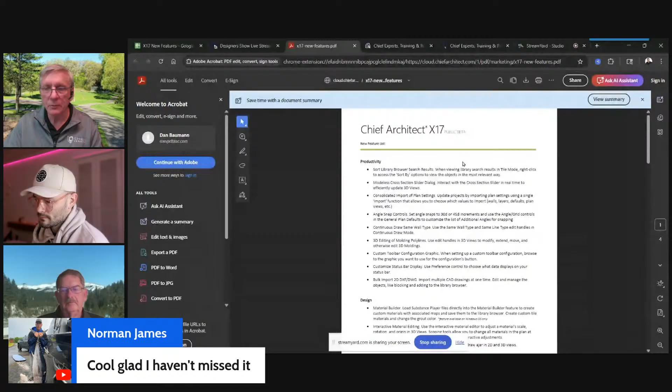This is something they do on every release, and it's a nice summary of some of the new things. Rene and I were just commenting that it's not a really long list. Actually, it's not bad. It's 4 pages. But we've both been discovering a lot of other little things in Chief that aren't necessarily even on that list. So it's a nice update, really a nice update, I think. And a lot of new things have been added.

The other thing you'll see on this is view the Chief X17 What's New page. And this is not available yet. I couldn't find this link anywhere on their website. All I know is that each time they do a new release, they use the same exact link. So I just clicked the link from the last X16 update, and it took me to the X17 update. Don't tell them that. They're gonna fix it next year. No, they'll change it. Sorry.

Anyway, so here's your X17 new feature summary, and actually with the PDF, they use the same link every time too. If you just change that number, you'll get the new updated one. Anyway, so Dan, it's a nice way they keep it simple.

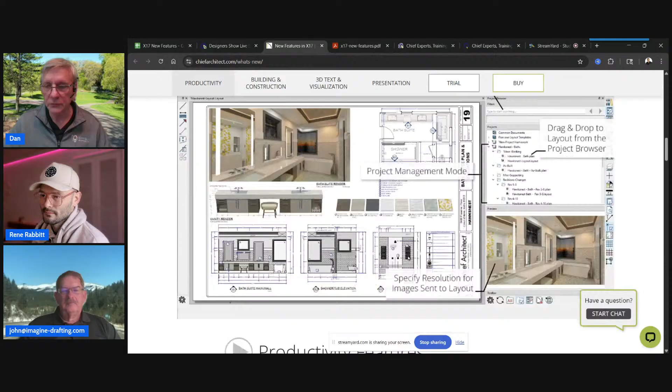Okay. So the thing that's nice about this, and I highly recommend you watch all of this stuff because they really do a nice job. I'm going to give Chief a super kudos here because they really do a nice job with these graphics, showing some of the new features. They got a quick list here, basically the same list you have in the PDF, just sorted out with some nice pictures. So check it out.

And there's about a 19-minute video, or they've broken it down into smaller videos that, again, kind of zip through some of these things pretty quick. And it's really a nice synopsis on some of the things that they've added to the new release. So check it out after the show. You guys been on that page? You've seen that? Oh, yeah. Any of you? Okay, so you've already been there. Is there a link to that on their website?

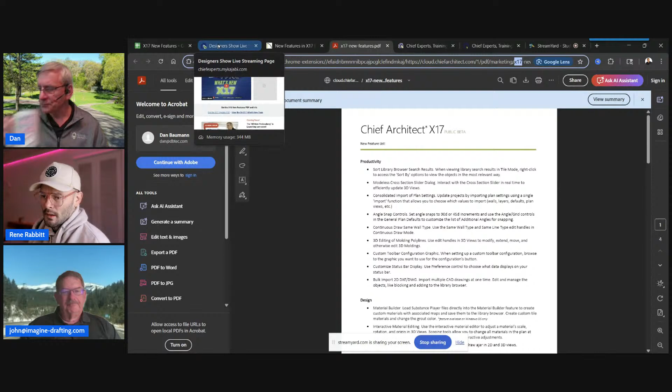They don't usually put that up until they're out of the public beta. Oh, wait, show me again. This page right here. Yeah. What's Chief Architect X17? Because if you go to their website now, it's just X16. They don't put this page up until it's out of public beta. Yeah. So it says beta now. There's got to be a link somewhere because they're saying it's in beta now. So I just couldn't find it. So I just use the same link every time.

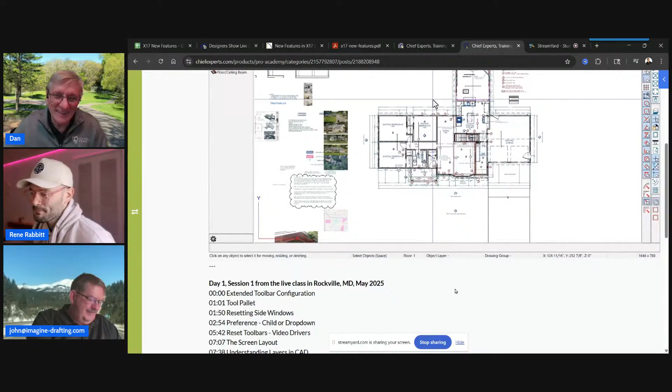Remember, I've been doing this for almost 30 years, and I started out doing my videos like this, where I had to go through each one. I had no choice. There was no AI. And I listened to probably thousands of hours of myself. And after a while, I don't want to listen to me anymore, but I'm okay with it now. So I guess I'm on my next stage of my career of Chief Architect training. So it's kind of cool. Anyway, it's a little time consuming, but it's all right.

I'm enjoying it. So let's talk about the new updates. So I just kind of took that same sheet that you guys can get from that link, that new features list PDF, and I condensed it onto a spreadsheet. So we're going to just go through some things today. We're going to talk about the yellow things today, and Rene and I will take turns. So Rene, what I'm going to do is just kind of pop through this list on my tab and go through those, and then we'll switch to you, and you go through your things. But you guys feel free to chime in too.

So let me start by saying we're not going to touch Project Browser a ton. I already see a comment coming up from Mike, who we know about Project Browser. Yep. We could kill multiple shows on Project Browser.

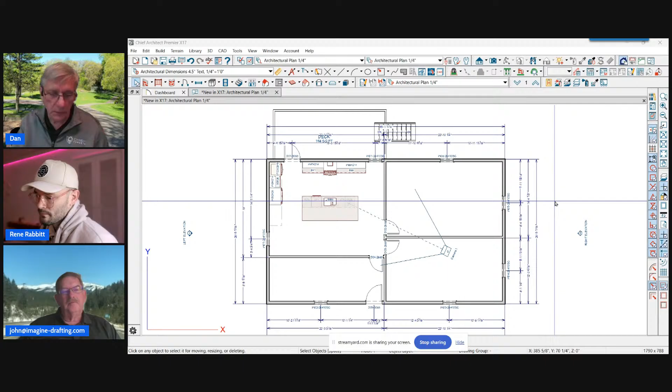As long as you brought that up, real quickly. Yes, there's a lot of controversy about it, a lot of comments, a lot of good and bad. We are totally aware of that.

So Rene and I were talking yesterday about that a little bit, and kind of like, all right, that's cool. One of the things about it is it depends on what you want to do with it. So for someone like me that draws by myself, I don't have other people, but I do share plans back and forth with my clients. I'm going to try it and see how I like it. I've only been in it for a little bit. I haven't really dug into it at all. Rene, you've dug deeply into it, so you know a lot more about what's going on with it. So that's why you did that video. You wanted to share that with everybody.

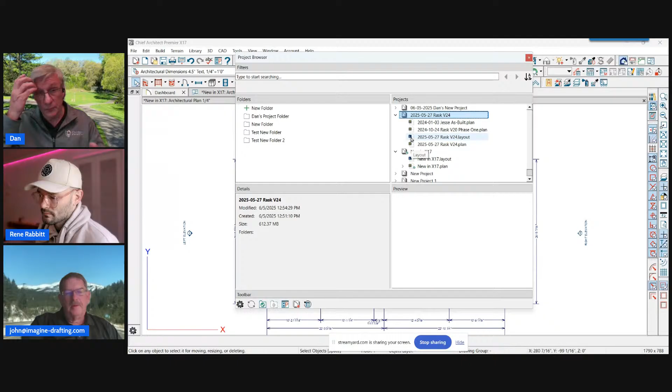The main thing to understand about the new project browser is Chief keeps everything in one big database. You can't just go find the plan or layout file in a folder somewhere because it's in a database file. All right. You can export the plan as a plan or as a project. You can export it as a, what do we call it? A backup like we did before, and open it like you've always done before. You can open any plan from anywhere on your computer at any time and put it in your project or not. So you don't have to use the project browser.

So I think there's a lot of benefits to it. On the other hand, it's going to take some getting used to. I don't know. What are your comments, Rene? Real quickly, so we don't spend a lot of time on this today. I think it takes some getting used to. I think there's some really nice things in there for versioning and ease of use and quickly navigating your own single user files.

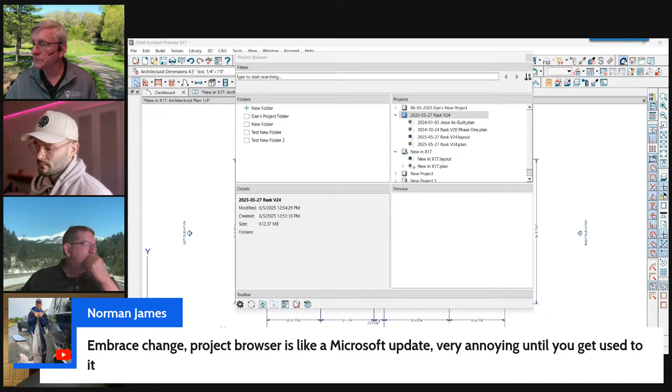I counter a little bit. I look at the traditional methods and the way people had their workflows established, and there's a lot of value in what they were doing, how they had it working, and how they see their teams and collaborators working. And it does not work that way. So it relies on human nature and habit in order to overcome that or work around its deficiencies. But Chief has said that they recognize that there's issues being brought up in the beta, and they're going to be building in corrections to those as it moves forward. They just haven't said when.

And originally they wanted to have this cloud-based so that you could access the cloud from any of your devices and everything's there. Well, they took that part out to get this part going. So this is a precursor to maybe the next version where they do introduce the cloud-based, where you'll have access to your things and you can share links to others to get to the same things, and it'll lock the file when you're working on it. So we got a lot of good things coming. They've been talking about this for a long time. I'm glad to see they've got this going, so that's pretty cool.

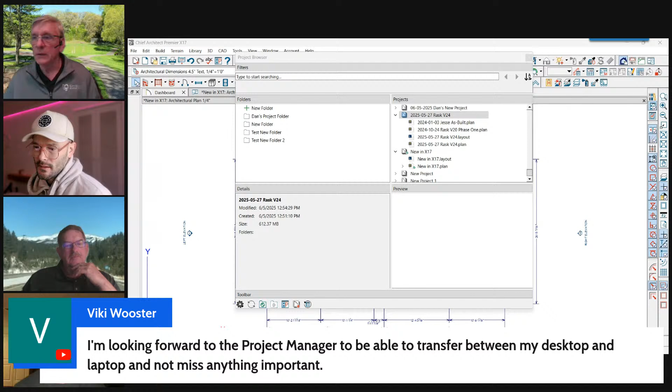Viki said she's looking forward to the project manager when you'll be able to transfer between desktop and laptop and not miss anything. And yeah, Rene, what's your solution to that right now? Well, just export your CA project file. And my suggestion, and this is for your own risk tolerance, is delete it from your machine once you do that, because that export is the active copy. Think of it as you're just saving it. That's it, right? Yeah. And when you save it, close your machine. It's not in Chief Architect anymore. You got to go find it and open it again.

Yeah. So if you're going to be collaborating with someone else, or you're going to go from one machine to another, export it, delete it from this machine. And so when you export that, is it taking everything? Yeah. In fact, Dan, if you hit delete right now, instead of export, it'll do both.

It'll export and delete, that's why they have it there. Yeah, so that makes sense. So you could do that. Don't worry about losing anything, because you do have a copy in your archives folder. So that's still there like it always was.

So you could even just go open archives back and forth if you wanted to, if your archive was on a shared Dropbox or something.

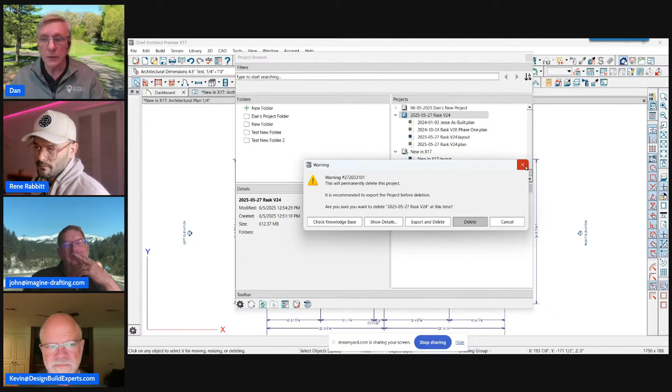What they have said, Rene, I was talking to you about this yesterday, was under the project management, I was wondering about this. Because when you uncheck this, it says do not put this on a shared drive. So when you go browse, it says don't do this, your life will end and everything will be miserable. I can tell you some advanced ways to do this, but that's advanced. Not today.

So the one thing I want to say for people watching this show is this is all working towards a system where your account is essentially able to share files across accounts through a cloud to someone else seamlessly. Keep in mind, Chief is having to work around a billion copyrights to come up with their own system, so I think they're doing a really good job. They're working towards it. I agree with you, Rene. They're doing a superb job and it's getting there.

So I think one of the big challenges they're trying to overcome is sharing. Of course we already know that, and I do that with Dropbox now, but it's the linking of all the stuff that goes within what you're doing, between the layout and your PDFs, pictures, graphics, and images and all of this stuff. It just doesn't get saved in one file, it's all over the place.

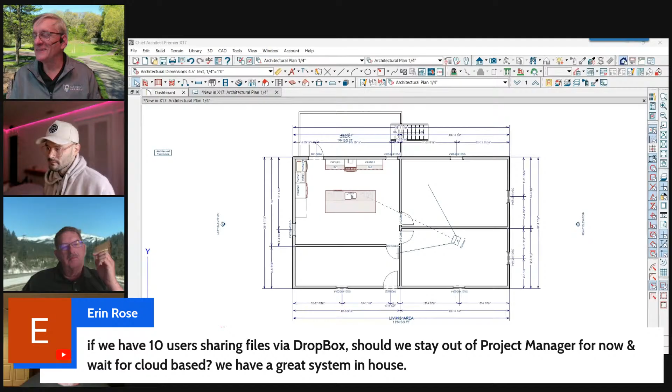My recommendation, Erin, with 10 users sharing files on Dropbox, is that's a dicey risk that you may want to stay with the traditional until things are either more solid or more advanced in terms of sharing and collaborating. I would agree with that. That's what I'm going to say. If it ain't broke, you finish the sentence. If what you've got is working, don't mess with the project browser right now.

Especially for collaborators, especially for teams. Do it, it works great individually, but for teams it's tougher. But hang tight on those comments, because as we dig into it deeper, I had to argue this one to the hilt, man.

And as we watch Rene's, let's come back to this topic. So for now it's working fine, don't worry about it, we're going to figure this out. And Rene, I know you're already on top of it, so go watch Rene's video. Maybe you'll come up with a better decision then, because he just finished this video right before the show, so I haven't even seen it.

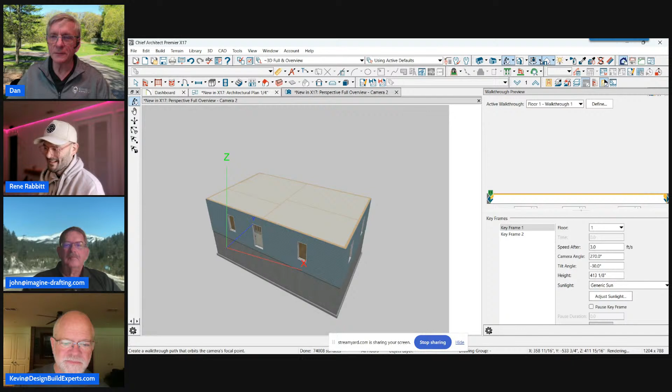So when we go into a 3D view and we go to our cross-section slider right here, this little bad boy right there, that is... where we go here? Wrong one, those two icons always look the same to me. Okay here we go, I didn't want that one. Let's try this again, okay here we go. I keep clicking the wrong one, I didn't want that one either. Let's start over. Okay, 3D view, cross-section slider.

And what we could do now, what we couldn't do before, is this.

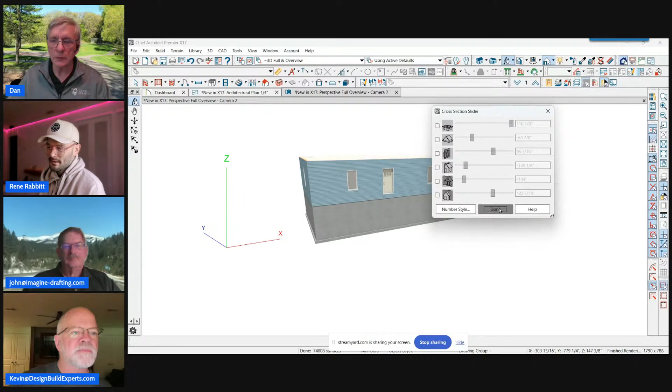When the cross-section slider was open, we couldn't interact with our model. So now we can do all of these things and still interact with the model, look into the rooms, rotate it around. I really like this. It'll be really handy when you're trying to figure out how things are lining up. You'll stay that way until you come back and turn it off. I think over time we're getting to a way to do 3D details really easily.

I think we're a little ways off, but we're getting there. I agree, because the models are starting to get so good, especially when you add framing and all that stuff. There's still things, overhangs and all that, that have to be fixed, but it's getting close. They're doing a really good job.

Consolidate import of plan settings. They used to have separate things in here - import plan views, import layer sets, all different things. Now it's just called import settings from a plan or a layout.

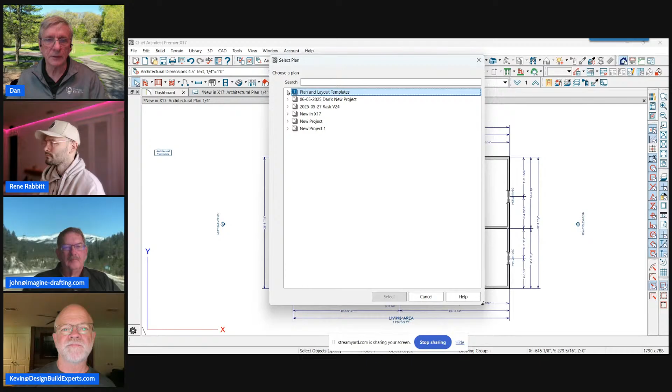Let's take a look at that. File, import plan. If I go find a project or a plan that I've worked on, or even a template - this is one of the things I like about the project browser. There's all the different templates you could have if you're using multiple templates. I like one template, but let's say I go to this plan here and I want to import some of the things I've set up in this to put it in my template. So I've opened my template.

I'm going to import some things from a plan. I go select - okay, I guess I could go yes there. It crashed before when I was screwing around with this. Okay, so here's all the different things I can import now. I could import a plan view, import default settings, or import just individual ones. There's obviously a lot of stuff going on, but this is really slick.

If you've been in a plan and you've set up a layer set that you want to have part of your template, now you can do that really easily. Just go open that and import it to your template. Done. So I like this a lot. It's all in one place, very well done. Any comments on that, you guys?

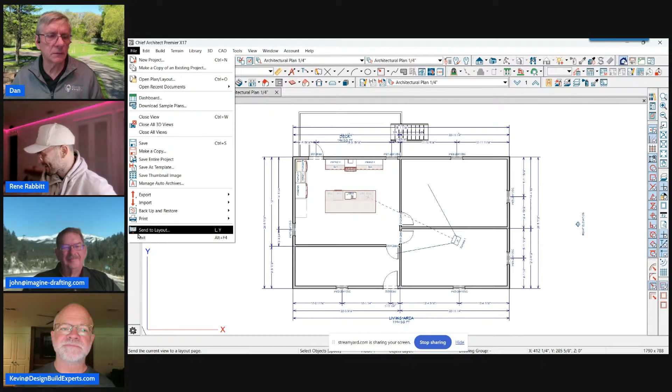We still can't import floor default. Oh, okay, dang it. Does it do all the defaults? No, it doesn't do the floor default. Doesn't do any of the floor defaults, but it does defaults though, right? Yeah, it does everything else. It still imports all the same defaults it did before, and we've never been able to import floor default settings.

Okay, Rene, I'm assuming you've brought that up. Why wouldn't they? Did they just kind of miss that? I don't know, we've brought it up for years. Floor ceiling platform - it's the only thing keeping you from truly transferring from an old template to a new template easily. Okay, anyways.

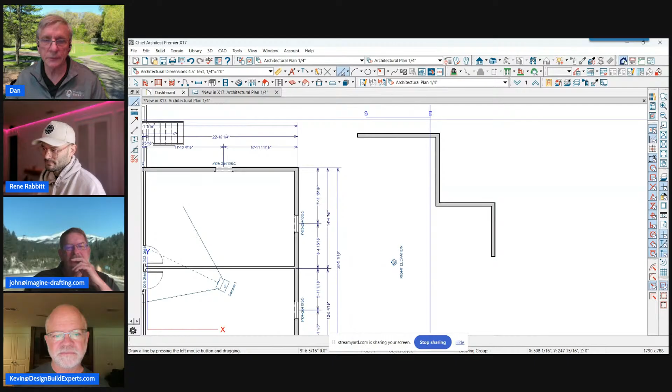This next one, continuous draw, same wall type. For those of you used to drawing with your right mouse button - this is one of my favorite features. If you draw something with your right mouse button, lines or walls, it just keeps it hooked up while you draw, click, and hit your space bar to end. Now you can continue doing that just by grabbing the copy end handle.

That is cool, it's so cool. Break that wall, Dan - just break one of them somewhere. This is common for me. And then now right click that continuation handle. That is just sweet. It is really nice, that's a really super nice feature.

By the way, you could hit left and right mouse button together to stop your draw as well. Either one will do it. Does it work for anything? Is it doing space when you do that, Rene? Same for polyline - no, it's not doing a space, it's just stopping the action.

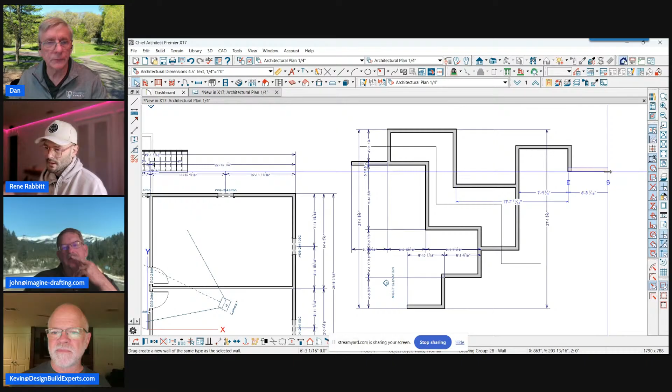Space bar stops it, or if you click space bar it's select objects, but if you just left and right, you're still on the wall tool. It's kind of interesting, because if I start drawing a wall here and then I hit my two buttons, oh, it just still drew the wall. Okay, before it deleted it. All right, cool. That's good to know.

In fact, it'll cancel some other stuff too, but I can't remember everything it does. All right, let me get rid of those things.

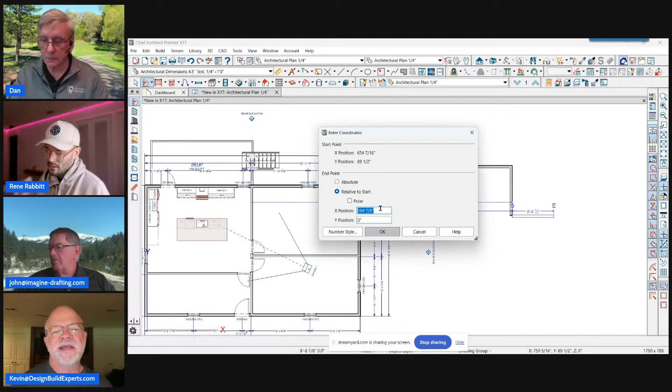Oh, and you can also, Lance just brought this up. This is a good tip: you can use tab in the middle of continuous draw, and that will continue. So draw out a wall, hit tab, right click, draw out. Type in your distance. So if I go minus 10 feet, hit okay. And it's still in continuous mode, so now you can draw with precision. That's cool. This is one of the coolest productivity things that's in this list.

They need a next button here too, but I like that. That'd be great for doing surveys.

All right, there you go. That's the alternative, not type, alternative, what do they call it? Alternative something, function. Right mouse button does a ton of stuff.

All right, then I've got custom toolbar configuration graphics. Look at that, I created my own little toolbar and I put my own little icon on it. How cool is that? So I can switch back to these different toolbars now, and then I can, so you can create your own little custom icons to switch between toolbars. That's just a matter of you go customize toolbars, and you go to the configuration tab, and now when you have created a toolbar, you have a place to choose an icon.

So kind of cool, Rene, I bet you have a bunch of those, don't you? Yeah, yeah. How many toolbars do you have now? I think I kept it to 6, but okay. I mean, you could do that before, it just wasn't as easy. And yeah, so that's nice.

They're actually working on toolbars right now too, so I'm excited to see what happens in public. What do you think they're doing? Any idea? Mainly I've been badgering the heck out of them so badly about sharing configurations that I think they've got a couple little features they might get into. Oh, you mentioned you might get that in X17 yet. Maybe. We'll see, that'd be cool.

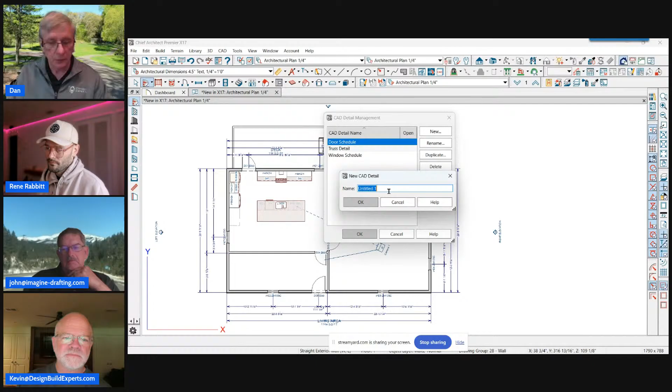I never imported a DWG into a plan I'm working on because I don't want all the crazy layers, but I'll just import it into a CAD detail window. So if I go to my folders, you could have a whole list of details you want to bring into Chief and organize, maybe they're part of a library. You want to bring in, start setting up your libraries from all the details you have, but you just drag those onto the screen and you're going to get a little menu here that says show import assistant.

This is really nice, I haven't tried this. Yeah, this is really nice. So if I want that thing that pops up to show, create polylines, put them on Chief's menu, which I probably maybe would, but it also automatically puts the detail into a CAD block. So you don't end up with a whole ton of lines on top of each other from all the different details. It creates little CAD blocks and sorts them out on your screen for you.

So you could even get them to add them to your library automatically. You wouldn't even have to, if you had all your CAD blocks named properly. So let me just go ahead and hit this. I have just two here. So I can go check these options, that there's all the different layers that are there. I'm going to import them with the layers that they already are on, in inches, and hit finish. And then it's going to import those two DWGs as separate CAD blocks that I could then add to my library, add to my plan.

You never even have to ungroup a CAD block in Chief, just so you know. You don't have to ungroup that to edit it. You just use this little icon right here to edit within the CAD block. So that allows you to edit just like it's ungrouped, but you're still working within the CAD block. So you don't have to end up with all these extra CAD blocks in your plan.

And then when you're done, if you were to import those two, it's going to create those CAD blocks for them, but if you would check the add to library button, it would add them to the library as separate CAD blocks in the library. Yep, it'd be separate items in my user library. One day, I hope they say, add to library in this folder. Oh, there you go.

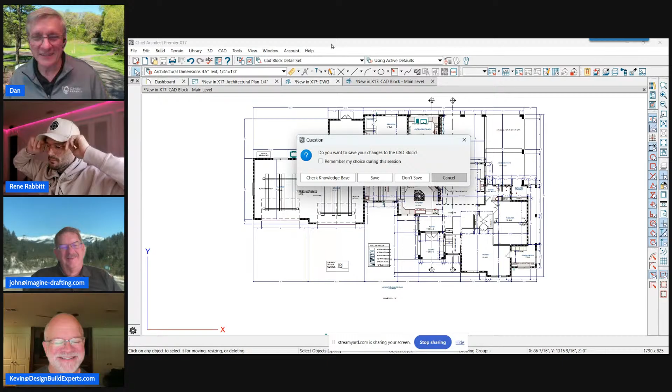And my little trick with this too is if it's a lot of detailed CAD stuff and I'm just referencing it, I'm not actually utilizing the CAD, I'm just drawing over the top of it or something, I'll put this in a separate file and reference it so that I'm not getting slowed down by big CAD blocks. A separate plan file, you're saying? Yeah, a separate plan file.

Hey, Mike mentioned this. I want to tell you, hey, Mike, contact me. I can make you those. He's asking about dark mode icons for Chief. There you go. I did Apple theme icons for someone once. You have too much time on your hands, Rene, and I don't know how you have any time. It's automated. That part's easy. I'd do it for him.

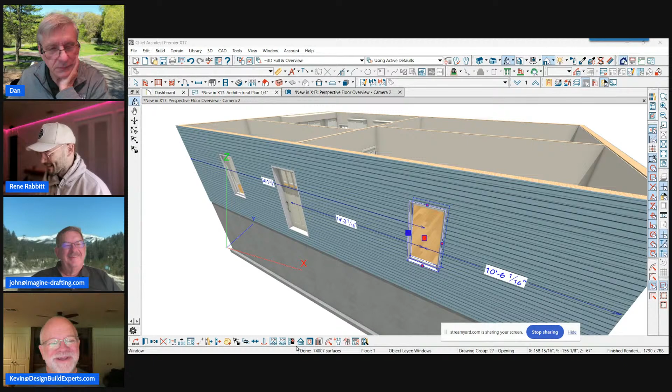So I have a question about the DWGs. Do they have it so you can batch export plan views as a DWG? I don't know. I didn't see that on the list anywhere. So export project, that's not DWG. Export all floors. This doesn't look any different than it's been. So I don't think so. You maybe want to export your elevations and all of that kind of stuff.

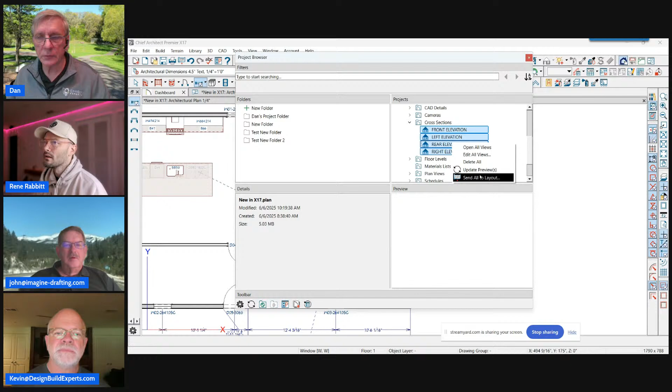What would happen if you grabbed them in your user library and then right-clicked on them? Do you get an export option there where you could multi-select? Let's see, you get export all floors, and you get export current view. Yeah, that's all I see. Edit, update, preview, send to layout. Nope. I don't see any export all. Delete all, edit. Yeah, one of these days. Okay, don't see it.

I just showed you a feature here. We can open and close windows. We could always open doors. It's just a little new icon down here to open and close. Oops, and I just closed my view, didn't I? So when you're in the window, here it is. So you'll see an icon. Right now it says to close the door or window or open it. So you get a new icon there.

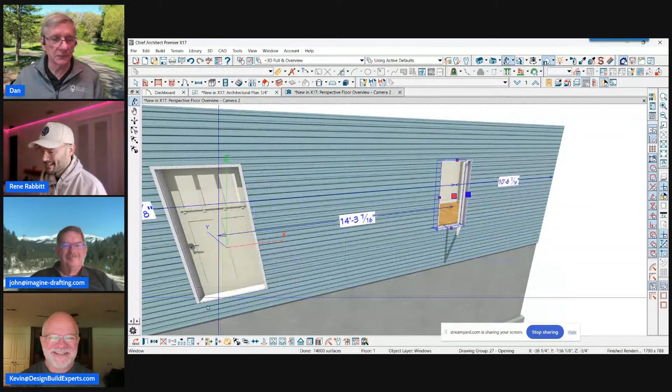And then you could just go into the dialog for the item and set the angle you want it to swing, or if it's like a double hung or something, you could probably set the distance that it opens, if I only want that to open a bit. Can you open the window and jump out in a walkthrough? Probably not.

And then the other thing is you can set it up so that when you're on the floor plan, let's see, where'd they put that? You can show it on the floor plan as well. Here it is, show open in 2D. So then if you're doing traffic patterns and things like that, and you want to see how the window looks on the floor plan, you can. Yeah, it might be nice to show that as your default egress window graphic. Yeah, exactly. So that's really nice.

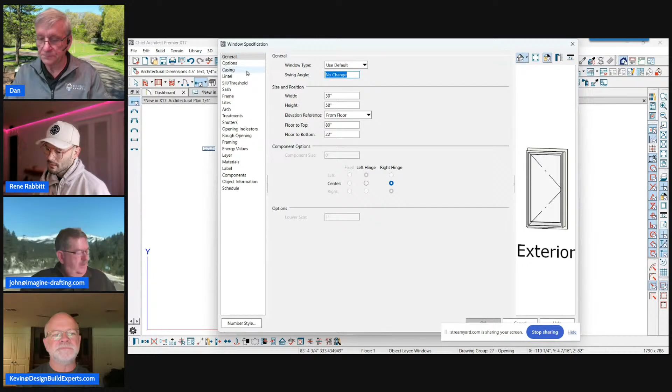Okay. We got a question from Erin Rose. She says, is that one window at a time or all windows to open, close? I bet you could do all of the windows at once. So if I highlight, you could select them all at once and do that setting. Yeah. I actually set up a style palette that is open and close door tools, so I get to swipe which ones I want open and close.

Okay. Show open. So I've got them both checked. So I hit OK, and if I go look at my camera. So Erin, you know how to make a style palette. You learned that in my class if you were paying attention. Make a style palette with your open window, open door settings, and add it to your toolbar.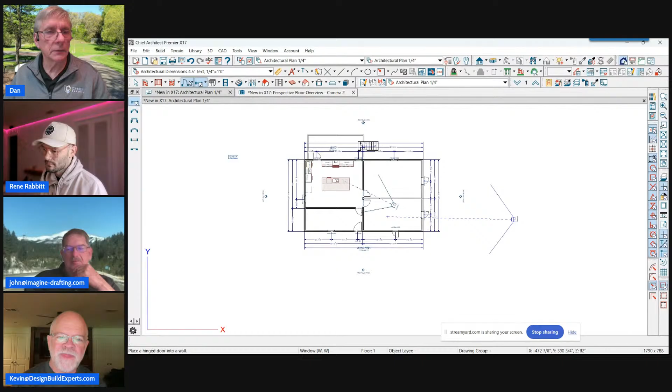Oh, I bet if I set that up as a default, they'd be open right away. Although, why didn't it do it for both of them? So when I selected them, I selected them from the floor plan, and I thought I'd check that in. Maybe I missed something. Should be able to do it as a group. So I highlighted the window icon. I highlighted all the windows. I opened the dialog. I hit.

She meant in 3D. See that? Yeah. Those are dashes. They got to be check marks. So if I want to close them all, now they're all closed. If I want to open them all, make sure those are check marks, not dashes. There you go. So yes, you can do that.

Erin was asking about doing that in 3D. Yeah, she's got to select them in 3D. Any view, just group select them. Absolutely. Yep. You can group select them from any view and modify them all at once, just like you can with anything. So, all right.

I'm going to do one more thing, and then we turn over to you, Rene. Do you have that list, Rene, by the way? No, I don't. Okay. You should have got a Google notice. If you go to your Google account, you should be able to open it. Okay. I got a couple dozen to do yet. We're gonna probably have to do three shows on this. Thought I could get through my list in one.

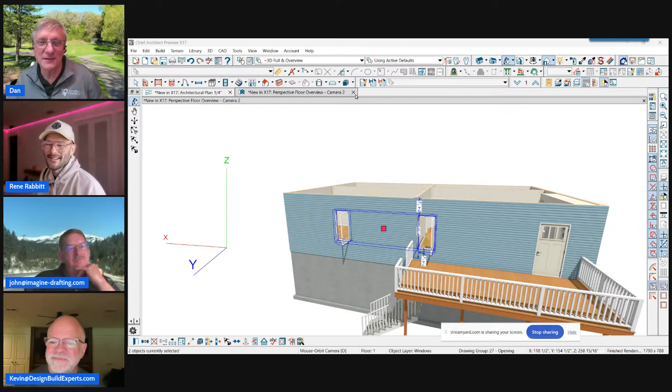Okay, I'll show a really cool one. What do you got next? Gang boxes. Okay, so you ever done electrical, and you have these switches, and they're close to each other, but I'm in the wrong view, of course. So from floor plan or 3D you can click on those switches. I don't know if there's a distance they have to be next to each other. I don't think so. But you just click on them, and there's a new icon down here to gang those together. So you can make them into one. That's so nice. Back on your floor plan, you can still hook individual things up to them. So that works really well.

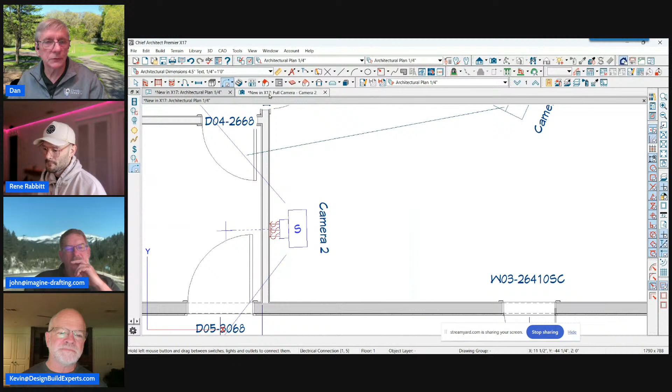Let's see here. I like that a lot. I do too. I think that's a really nice little feature that they've added. A little productivity thing for you. That's probably what was under the productivity tab. Yeah, individually, it's really hard to get all that to look nice in the plan view. So I would assume we could do the same with outlets. Let's try it real quick. I haven't tried that. Maybe you want a bunch of outlets. I probably wouldn't do this very often, but will it work? Let's find out.

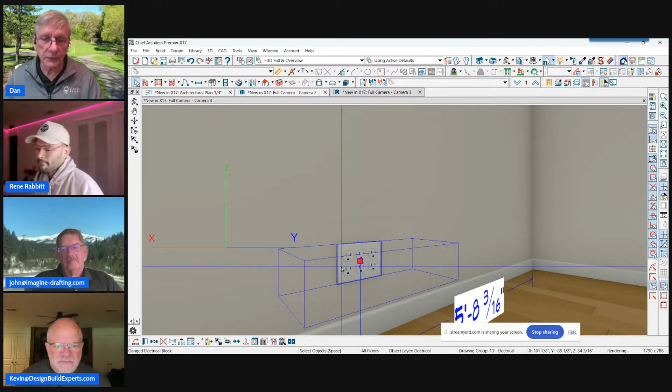I highlight 1, 2, 3. By golly, I got a whole bunch of outlets in one plate now. Cool. That's pretty cool. So you're telling me I could gang outlets, switches, different kinds of switches, all of that stuff together. The other thing I really like is you could change the spacing in 2D. So if you open that up. Oh, I could do that too now. Oh, just like stacking windows, probably. Okay, you got to group each row, and now I can make ganged electrical.

Will it let you do that? Oh no. That'd be stupid. They're like, what are you trying to do? That's a heck of a wire packing. Yeah, you're going to cause a fire, buddy. All on a 10 amp circuit. Will you open that up, that ganged now?

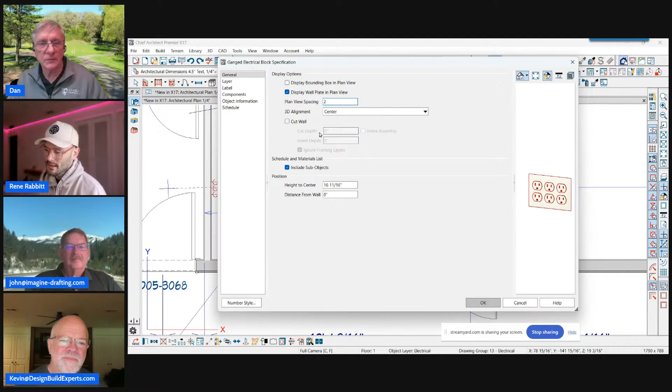And now see the plan view spacing? That's something I really like. So set that to like 2 inches or something. Oh yeah, right here. The other thing that I like is that you can offset the alignment. So offset it to the left, for instance.

Oh, this. Okay. Yeah. And so this is, I guess, kind of a way that, if you have switches aligned with outlets but you've got a plan view that you're dealing with, you can do that. Help me understand that. You ever have a switch right on top of an outlet at a different height, and you're trying to illustrate that they're both there in alignment? This is kind of a way to do that, because you're offsetting them. It'll just offset it in the plan view, but it'll still be correct in the 3D. Yeah. Cool. Like that.

And the other thing I was reading about that is you can now have that report on the schedule as separate outlets, even though they're ganged together. So you could have different kinds of outlets in there, ganged in with one plate.

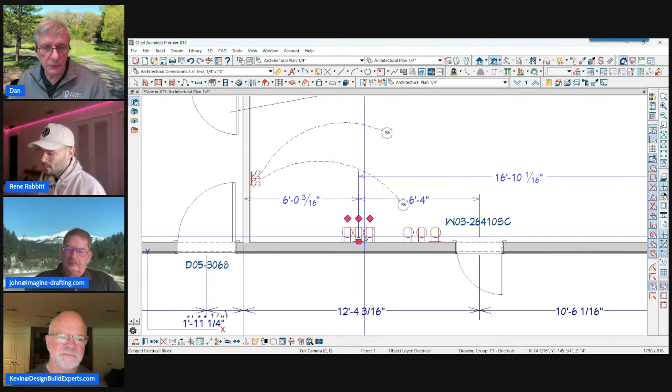Yeah. So anyway, I wish Robin was here, by the way, because she would get fired up at this question from Mike. Yeah, I was just thinking the same thing. What's that question? She would get blah blah blah. What's the question? She's listening, you guys.

What's the question? Permit authority does not require an electrical plan. Would you create one anyways? I would only want to do an electrical plan if it was 100% signed off by the final buyer. And this is where I'm the professional. I know how to do lighting. I want your space to look as good as it possibly can. I am absolutely doing an electrical plan, and don't screw it up.

I'm with you, brother. Besides, you need that in order to hand things out to trades for bids. They need to know whether you're talking about 6 can lights or 60 can lights. Yeah, but he's design build, and maybe he's his own electrician. Who knows? Yeah, could be.

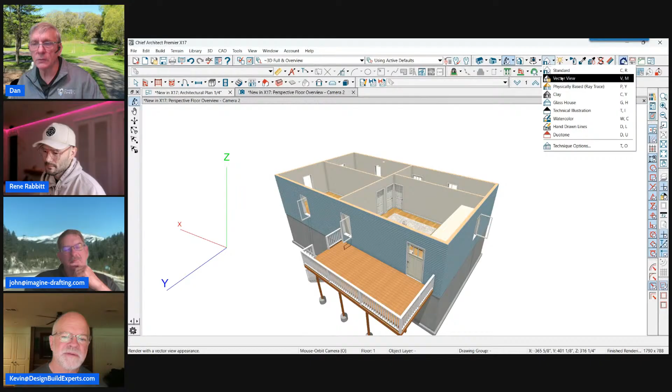Hide camera facing exterior walls. You guys ever use that? Oh yeah. It used to be it would hide the wall, but nothing on the wall. Now it hides the things that are on the wall as well. Oh, cool. So everything except base cabinets. Right. But it hid the wall cabinets, which I don't know why. So yeah, that's a really nice way to look into your house. So hide, keystroke of HW.

So maybe base cabinets because they're attached to the interiors. No, that wouldn't be it. What happens with a toilet that's attached to that wall? I don't have one attached. Should be hidden. Let's go find a toilet. With Rene's toolbar, I would be done by now. Let's see here. There you go. And is it attached at this point to the wall? It's pushed against the wall. If I click on it here, it's bumped against the wall. So no, it does not.

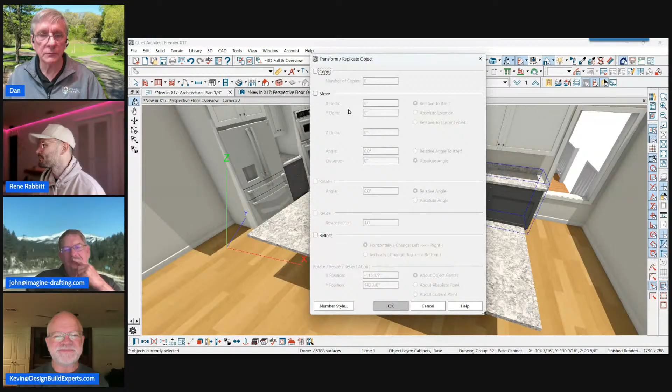All right. Now raise it 1 inch off the floor. It probably says the floor takes precedence over the wall. So you can bump your base cabinet. Go move the base cabinets up 1/16 of an inch. Yeah. Exactly. We're making it 1/16 of an inch shorter and being a 16th off the floor. Let's just raise them up 1/16 of an inch. And go hide my walls.

This is where we just start playing, everybody. Yeah, we're being goofy now. Come on, what's going on? So much for the list.

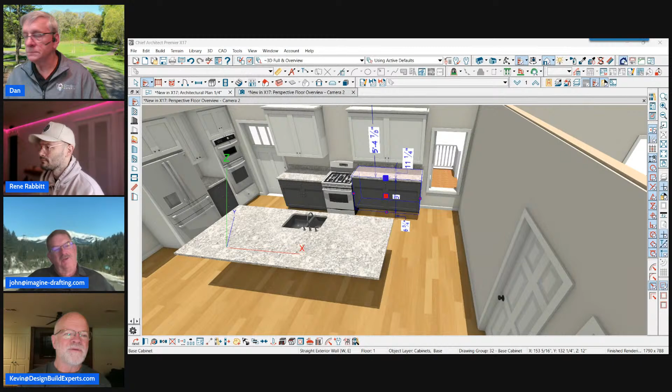We found a squirrel. It didn't work. I tried it. Still shows it. How high do I have to go? Base cabinets just will not go. Okay. So don't hang any base cabinets on the wall. I wonder if there's a setting for that, because sometimes you do have the cabinets hung on the wall. I wonder if there's a setting in the base cabinets to control that. So if someone finds that, speak up. We're not going to look for it now. The outlets do turn off though, right? All the electrical, doors, windows, all that turns off. Yes. You're fine.

Nobody can see. Okay. Dan's talking to somebody on the golf course. My wife and mother-in-law have to leave. They don't want to be in the camera. Okay. Let's get out of here. And I'm just going to keep going. Rene, you get the show next time.

Drag and drop views from project browser to layout. I like this one a lot too. So if I go open a new layout, and that's one of the nice things about the project browser. When you create a new plan, it creates a new layout to go with that plan automatically if you want it to, which is kind of nice. So then it stays in the same place, same folder. It's all set to go. You start putting stuff on it.

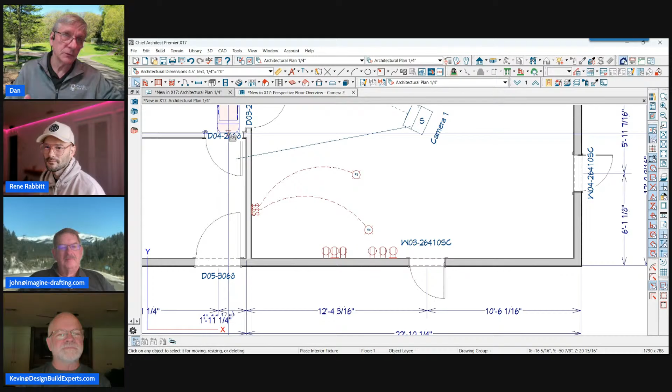If your template has a bunch of views already on it, I wonder, would it automatically link it to the new plan and populate it automatically? Have you checked that yet, Rene? So I do a different thing, and this was in that project management video. Okay. I don't use the template. I just copy my project that has all the links in it already. Oh, okay. Yeah. I'll have to watch that. That sounds pretty interesting.

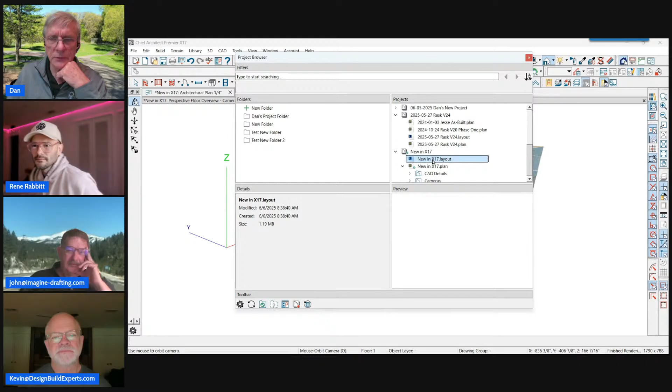What am I doing here? I'm looking to create a new layout. Open. So basically, new project. That's what they want you to do. Oh, I would already have a layout with this project. What's new in X17? When I created this, it already created the layout with that. So if I go to new, here's my new layout. I think I can just open it from here, right? Open. Come on, there we go. There's my new layout. Let me just tile my screen.

So I've saved this view. Let's save this view quick. So I'm going to click this icon right here with a pencil. These are my 3 favorite icons these days. And this is my new view, I'll call it. Okay. And I'm going to click OK. And I'm going to then go to my layout, which apparently I closed. There it is. Okay. And I'm going to go to my project browser now, and click on the cameras.

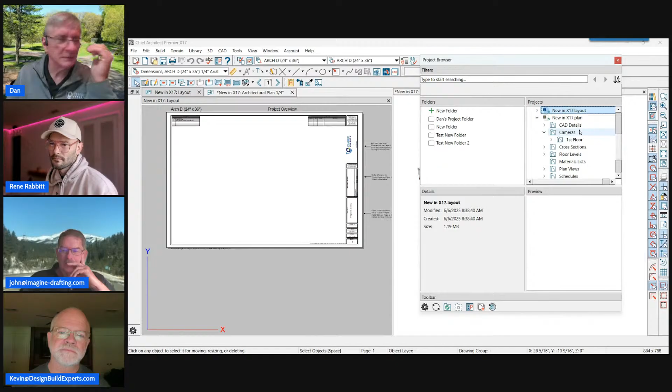And where'd I go here? New in X17. I'm in my plan. I'm in my cameras, first floor. Here's my new view. I just dragged that onto the layout. Yeah, that's so nice. I feel like this is the start of a really nice feature too. Like this is the entry level drag and drop. We're going to get more robust drag and drop. Again, remember your alternate move is with your right mouse button. You want to make those views bigger and smaller, use your right mouse button on the corners. So that works really well. But I like that a lot.

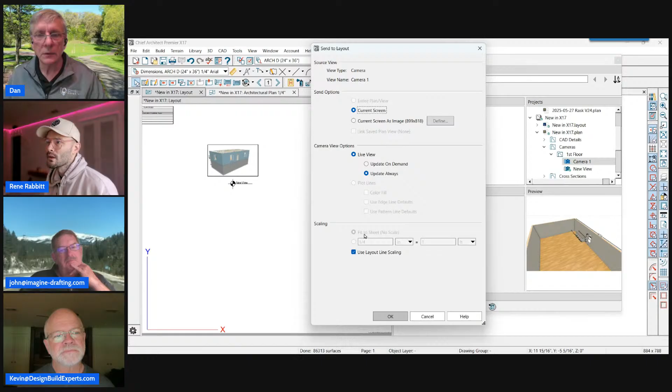So I wish, though, what I could do is just drag this on top of that viewport and replace what's in that viewport with what I just dragged on top of it. Because I might have a lot of viewports in place already. I do that all the time. Replacement mode. Yeah. Put that on the list. Everything we've taught over time is to establish those viewports in your layout and use them consistently. So that's not available. Well, you still have to do the same old relink it to that view, click OK. And now I've just replaced that view with the new one, and there it is. So it's really not that much harder.

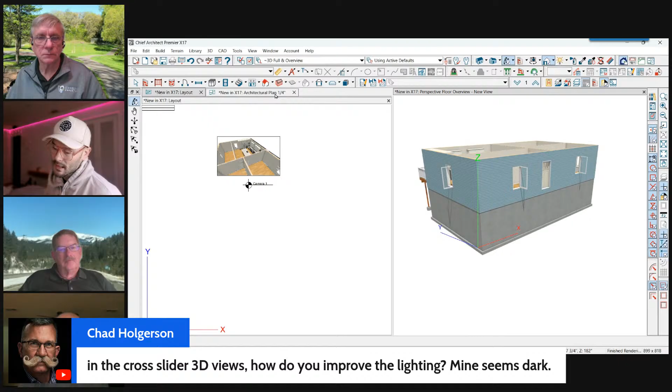Right. Rene, can you answer Chad's question? I don't see that screen, guys. What is the question? In the cross-section slider 3D views, how do you improve the lighting? Mine seems dark. I would change to using a lighting set so that it's redoing that 3D based on that lighting set. And then keep in mind, automatic exposure is the default rendering. So if you're in a ray trace view in a cross-section slider and it's too dark, you might want to switch to manual exposure and override those settings, especially if you're coming from an outside 3D view where it's not necessarily using a light set. It might just be using your settings for how many lights are turned on. So there's a couple different ways you might address that issue.

And then, yeah, you're showing a new feature that I love. Yeah, this is pretty cool. So I'm clicking on that gang of outlets. Okay. And you have one of them connected. And I've got 2 switches connected to different lights. So I hit my tab key. Now you see I've got that center one. And I've got this little thing right here. If you look at the icon, it's a light with a little slider on it. So I can turn the dimness up and down on that. Let me just switch to PBR here and see how that looks. Yeah.

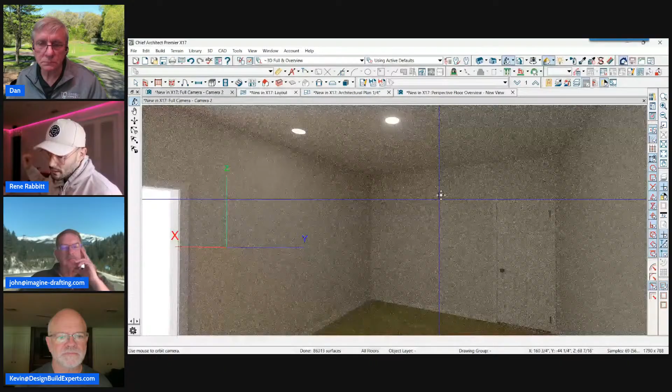So if you've used the electrical connection tool and made your full branch circuit, now you can control all of those lights from the switch. And if it's a ganged one, like Dan said, you've got to tab into it to get this setting. Yeah. So that's one way; you're going to see how that light's dim or off compared to that light now. So I think that's pretty cool. That's going to give us a lot of flexibility with how we do things.

So I like that. You can also, what were the other ways? You could go to this one up here, right? And you can adjust them here by adjusting the intensity or brightness. Or you could group select them and adjust them all at once if you want. But again, you use light sets, so you would just apply a different light set to the space. We'll cover that one next time. That is on the list.

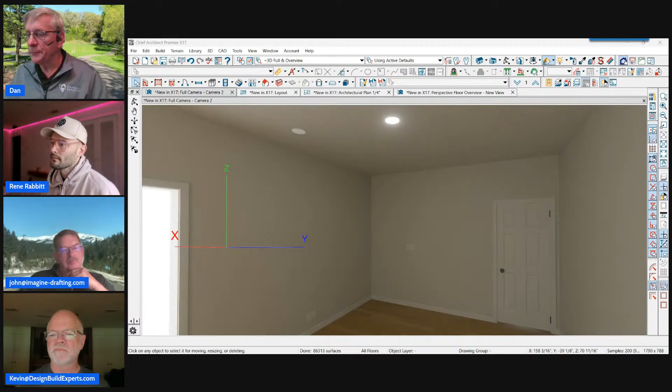Can I touch this one about Mike, actually? What's that? He's asking, my most favorite thing I've ever seen Dan do is where he creates a reference drawing that shows as-built versus new with partial glass house. The reason I wanted to show it on my side was to show you how to do this with the project browser.

All right. Well, we've got 8 minutes left. I probably need 5. Okay. Yeah. Right. 5 computer minutes, hockey minutes, football. 5 my minutes. Okay. So, go ahead. Here we go.

I copied my entire template plan over and I started drawing just in the last 2 minutes. I drew this little thing here. I already have my as-built sent to layout. In fact, it's sent to 2 different layouts. So I drew what will be my as-built in the new plan file, which is also sent to these layouts.

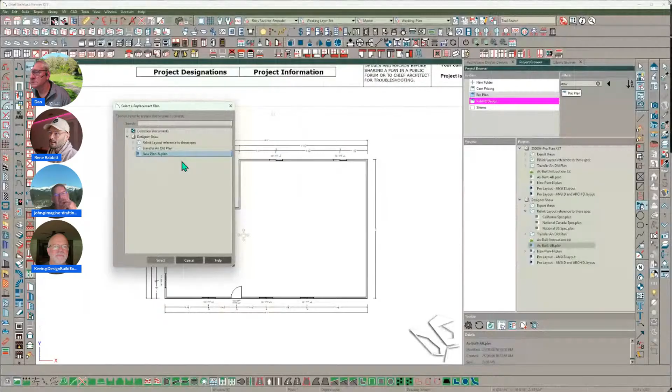I will click on as-built, replace with. It's going to warn me that the as-built's been sent to 2 different layouts right now. I'm still going to say replace, and I'm going to pick the new plan. That's my active tab right now. This is not a save as. What I did was basically transfer all this data in the new plan to the as-built. So here's the next part of that. I'm going to draw a little addition off the back here.

When I go open up my template layout plan, you're going to see there's my plot plan being developed from new. There's my as-built that I just transferred. There's my new on the next page. And all my views are pre-sent. Everything's done. I have to rebuild my elevation views, etc. But all this stuff is linked and sent.

And not only is it sent to this ANSI D layout, but it's also being sent to an ANSI B layout at the same time. It's the same project being sent. So this is what's really cool about Project Browser.

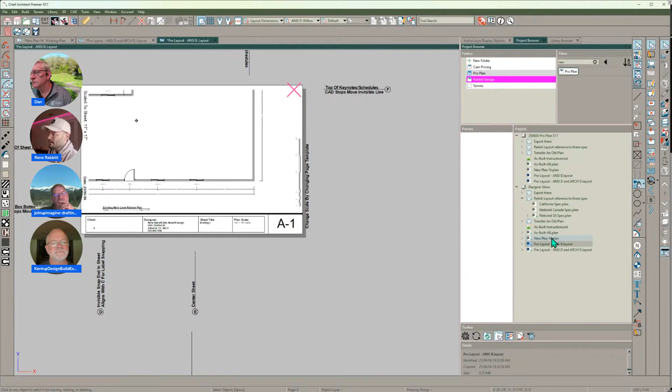And then just to show what Mike was talking about, we could come in here to the as-built side if we wanted to, if this is maybe what we want to do, and pull a 3D view. And then we're going to change our floor reference, which is your up-down floor key. And I will go target my new plan right there. And I can show it as a glass house in this view.

There you go. So, and I did that in 5 minutes. So nice job. There you go. Even less than you. Yeah. Wow. So yeah, that is cool.

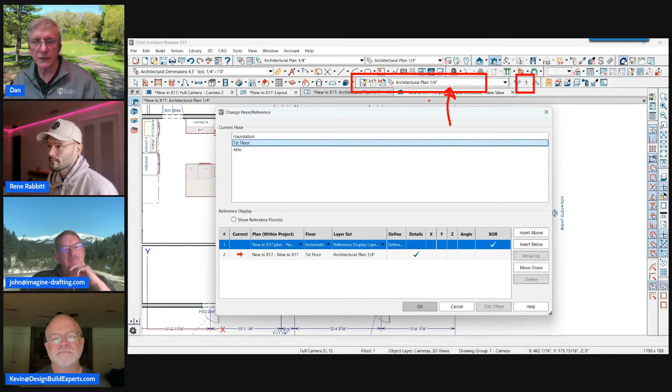Those are the floor number. When you click the floor number, you can specify that for this view. Now we're working in this view, and we could save these views. You know, we could hit save as view and create a new view to do this in, so that view stays, and we just have to go reselect it anytime.

And then you're just selecting what you're going to reference. So just pick a different project, as long as they're in the same spot, you know, the same coordinates. You can be referencing floor plan, elevation, 3D views. Any of those different views can be referenced that way. So give it a try.

Just click on the floor number, click on, let's see, which one is it? We want to go to the reference display layer, we want to choose the project plan, choose the project. So choose a different plan, and then you can reference that. Anyway, if you haven't done that before, bring it up again next time. We'll talk more about it.

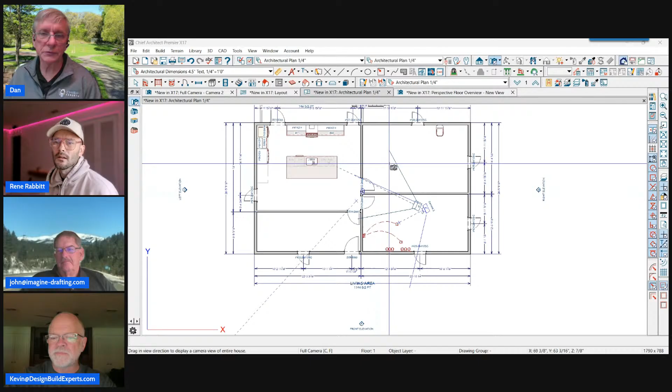Specify image resolution. I like that because when you're on the layout sending views, the layouts see how they look so grainy? They'll print perfectly fine, that works, but sometimes you want them to look nice on the layout page too.

I don't think I can adjust it once it's on the layout. I have to adjust it on the way to the layout. So if I bring up that 3D view again and send this to the layout, I now have the option to specify current screen image size. So let's go 1024 by 932.

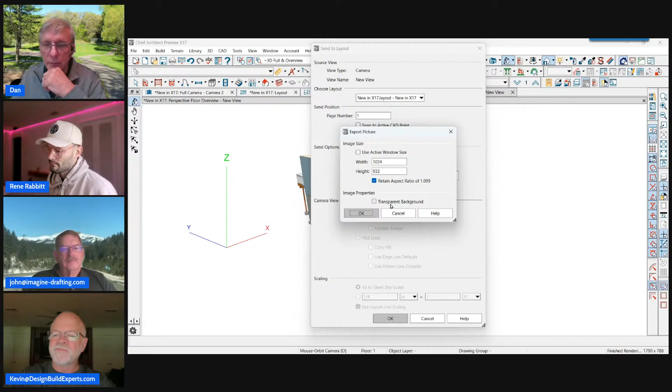So you just go higher resolution. I wouldn't go too high. Let's click OK. You can make it a transparent background if you don't want any background, you just want the house, which is kind of cool.

So there you go. Now you're always going to have... why does it look so skewed? Yeah, you changed the resolution to something weird. Did it not change it? Wait, see if you can redo the other one now that you know where the button is - retain aspect ratio.

Open this linked view, because it's a live view, not an image. Gotcha. But it's still sending these as a live view? No, that's just an image now. Oh, it does become a picture. Well, that's no good, I want my views to update, man.

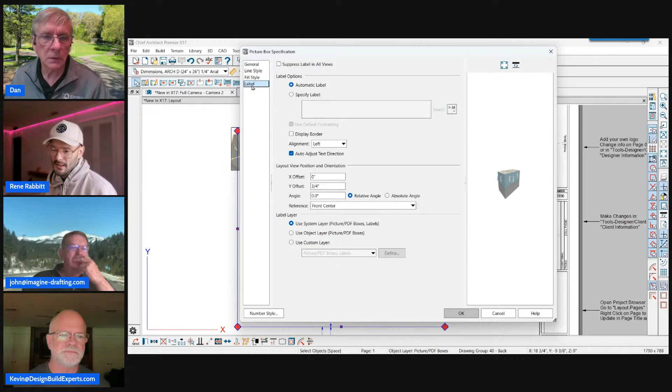Well, if you're someone that's sending a ton of these, it's better just sending a static image. I don't do a lot of that, especially in the early stages of a project. But if you're creating a layout with high res, super duper rendered images, you'd want to send pictures, because it would take forever for that layout to print otherwise, since it's going to refresh every one of those views.

All right, is there a way to specify the size of the image on the layout page from the dialog box? That would be nice instead of bringing it in big like that and having to resize it.

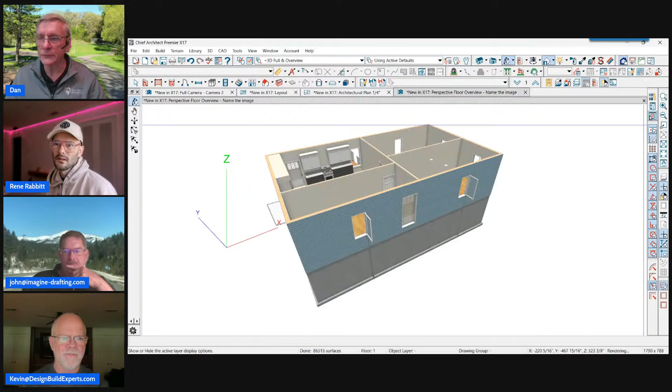That's why what I always do is I just save the image - click the little pencil, name the image, and that's going to be saved in your project browser. Then on my layout I'm going to create the boxes that I want that to be in. So if I want to do maybe 3 of these views, I'll create the same boxes and just replace that view with the one I've just saved.

Name that image, click OK, click OK. Now I can use the icon down here to roll in and out to make it fit the box better. There we go, now I can move that in there. So again, when I print that, it'll print perfectly clear. That's how I do it on my layouts to keep the images the same size - just get your viewports in there, your layout boxes, and then replace what shows up in those. I think that works really well.

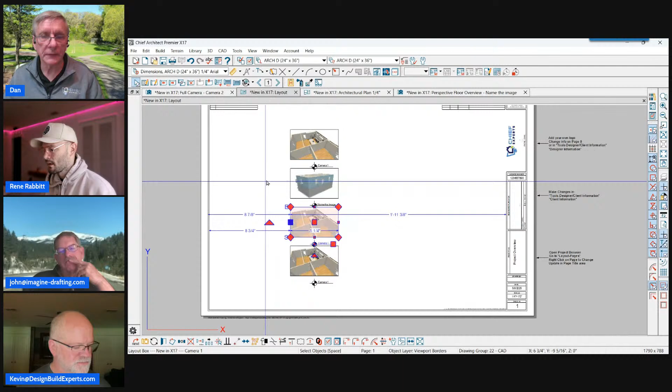Aaron's got a good question I want to answer real quick - can we save in plan when we import an image or PDF on the import window? This is a reason Project Browser really shines: when we import a PDF, it brings it into the asset manager, done, it's now saved and associated with the plan. When you save a project file or export it to a team member, it will automatically import that with it and put it in their own asset manager. So yes, you don't have to click the image, open the file, and hit save in plan - I checked this already, it's already saved in the plan. So yes, it'll do that with images and things like that too.

So if I have a question - I have a question, Rene. Can I export to a Dropbox file? Yeah, okay, yeah, I mean that would be my main workflow, working with other people.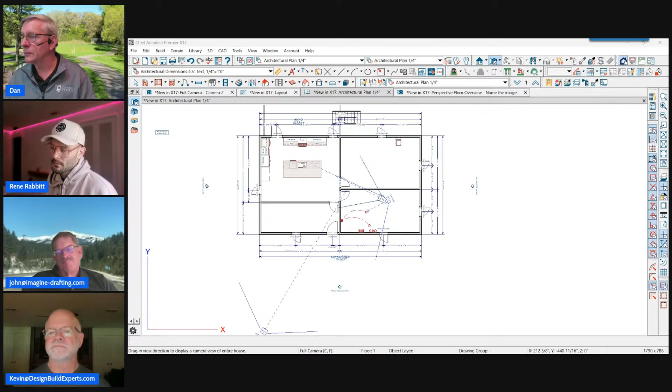Yeah, exactly. So I don't know what Norman's talking about here - forget the share model feature. I don't know, but the share model feature.

Huh, I don't know that one. Norman, Dan, can you show my absolute top favorite feature? I don't know, you're going to have to tell me what it is. There are so many favorites, how do we know?

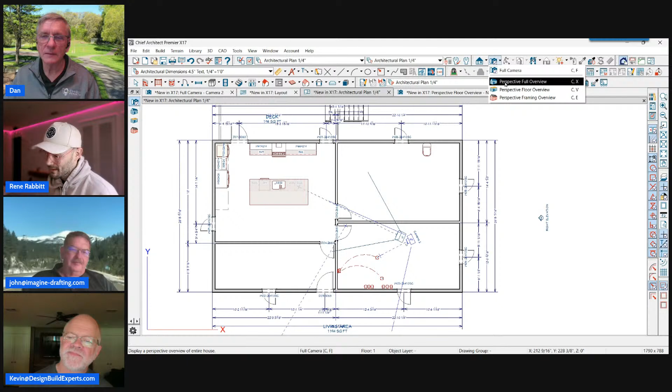Will you go to your 3D view? Bring up a 3D view. I can do that, you got one right there open already. Oh, I know what it is - temporary dimensions. You betcha.

That is really nice, I didn't even get to that. Cool.

You don't even have to do temporary, I could just do my automatic, and there's all my dimensions. Now I could do all my dimensioning in this view. So I could click on that - what did I just put in there? Something I didn't want. But I could click on that now and dimension it from this view if I wanted to. I can do the same things I could do on the floor plan, I believe.

I can add dimensions to different spots. I can - what is that? I didn't read that, I'll read that later. I'm still getting used to it, but what an improvement in designing in 3D. It's just awesome, no kidding. It is really cool, there's a lot of things you can do with this.

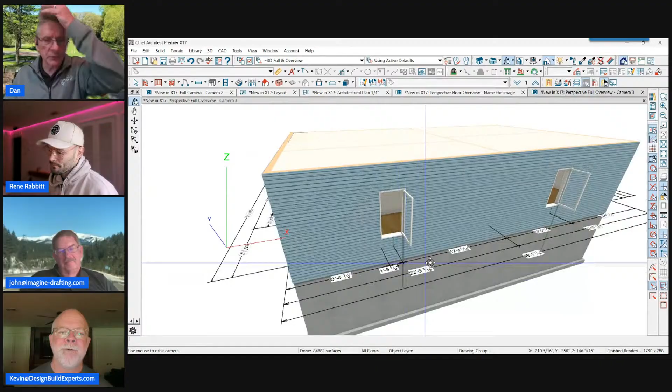The other thing to know about dimensioning, one of the cool things about it: if I want to dimension this wall, I have to click the ruler icon. The first thing you have to do is - see how the plane changes here? You have to click the item you want to put the dimension on to set the plane. Then you can go draw the dimension and it'll pick up the things on that plane. See how you don't just start drawing a dimension - you have to click the plane first, that's the one thing you got to click on.

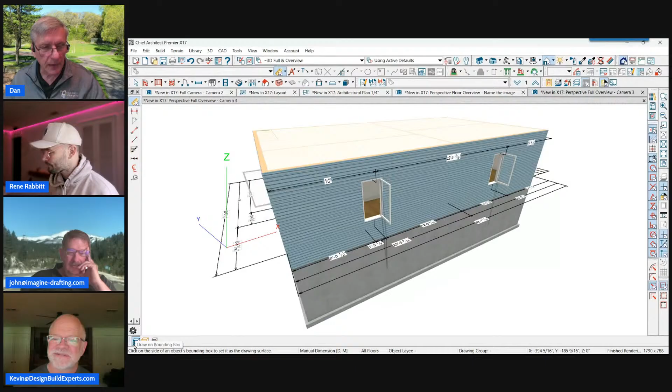The other thing to keep in mind when you're doing that is when I click the ruler icon, you're going to get some new icons down here - those little hidden left column icons. One of them is to draw the bounding box, I'm not sure what that does. This last one is going to set how far it is away from the object you're dimensioning. I've set mine at 12, so when I rotate this, you'll see my dimension is 12 inches away from the wall. So you could do that with your cabinets and all that.

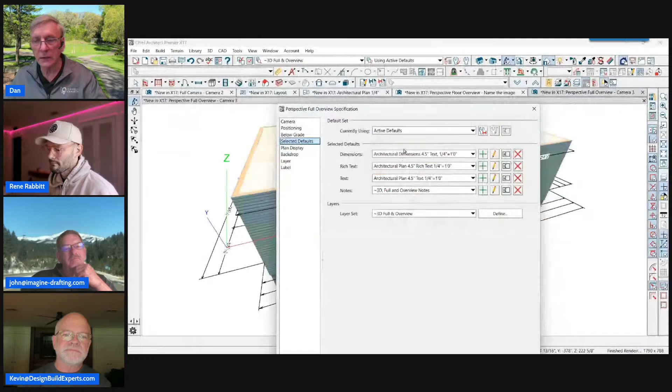The other thing to keep in mind with the new dimensioning feature is if you want to change the dimensioning defaults, you're going to go into the little pencil icon here to view the view specifications, and your selected defaults can be set up here now. So you could change this for each camera view you're working on. If you use the camera and want to do kitchen dimensions, change this to your kitchen dimensions and use that. Change this to your kitchen text and use that. I set up new default sets so that I can drive the dimension default in 3D. I haven't even gotten into that.

So, but yeah - hey, will you select the wall on the other side, or the door on the other side?

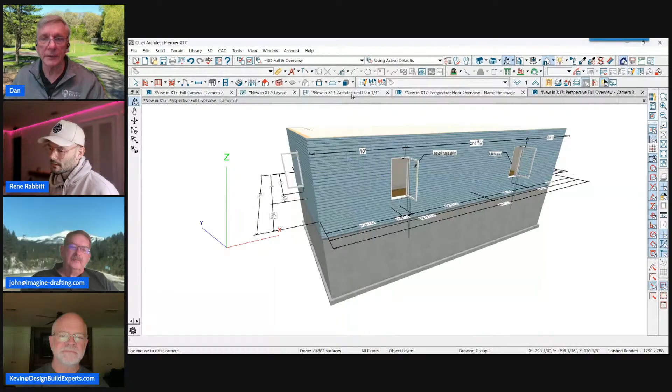The same thing with text: when you're doing the new text in 3D tool, you have to select the plane you're going to put the text on. First you click the text icon or the hotkey, click the plane you want the text to be in, then add your text. So I'm drawing my arrow first, and then I'm putting it in. Okay, I struggle with that, I'm glad you're showing this. I've tried it and failed. That's it - click the surface you want, you got to set the plane, that's the key. So when you're doing this, see how the grid is there? And once you set the plane, then you're ready to go. That's nice, I didn't know that.

That's the - will you select the wall on the left-hand side, the one with the window you didn't dimension to? This one? Yeah, go ahead. There's an icon to dimension this, so you don't have to go to the dimension tool. You can go to - that is right there. That little icon will dimension that. Is that the whole wall or just the edge?

It dimensions the selected edge. So when I click that tool, it should dimension that line right there, up and down. You've got to highlight the active edge you want to dimension. So if I want to dimension the edge of this window, see how I got that edge selected? Click that tool and you're going to get the height. You want to do the width? Let's click the edge.

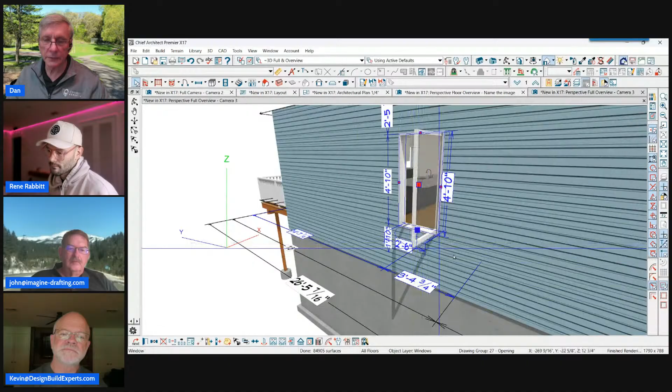I love that, that's really cool. I haven't even used this yet, but I'm already loving it.

Go back to that bounding box thing. They did a good video on this yesterday. When it's on the bounding box, it's going to dimension to the bounding box. When you select the other one, it's going to dimension to the items in the bounding box.

That's great, that's really great. You can tell it to me one more time. So I click on for a ruler, like for a toilet. A toilet is a bounding box. The one it's going to do to the bounding box, the other one it's going to do to the sides of the toilet where you're pulling to.

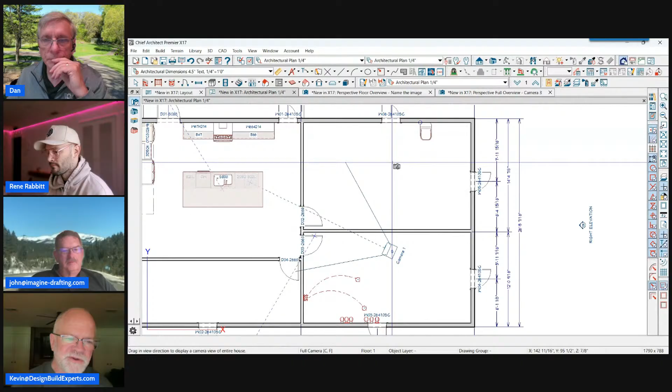If I go one back, that goes to the sides of the toilet - does it ignore the handle? The old way did not, and the handle threw it off center. So when I click on this and I want to dimension the bounding box, I click that, and now I'm dimensioning the box. Again, you've got to click the side you want to dimension. I should have clicked the front, and now I can do my dimension from there to there. It does take a little getting used to, I haven't quite got it mastered yet.

What am I doing here? Whatever, we'll come back to that. But anyway, that's what those two buttons do, and it's really, really cool. So check that out and have some fun with it, I think you'll enjoy it.

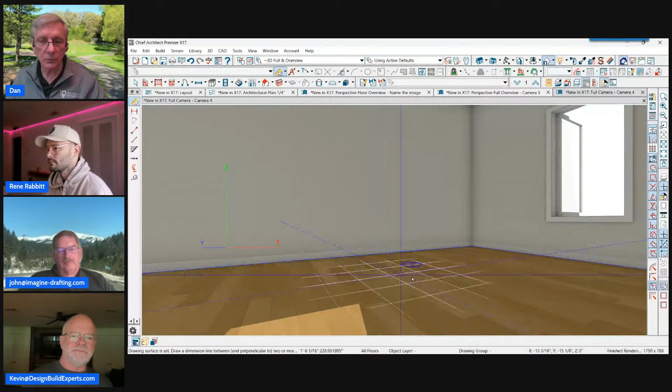And the automatic features work too. So if you click on a room and you click the auto room dimension tool down here on the toolbar, it'll dimension that room inside. So that's pretty cool too.

Let me get to this view - I'm not going to save that one. And again, if I click on the room and hit the auto dimension room, there's the dimensions for that room. I want to move that window, I can do it here.

Click there - I can't imagine how they program this. This is really cool. This is more, now we're getting into the SketchUp world, aren't we? I've never used SketchUp, but I'm assuming it's a lot like this.

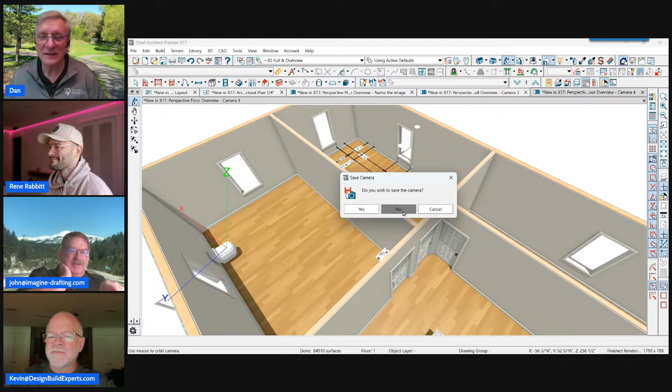Okay you guys, I think we're done. One more thing, just one more. Go to the dimension, click on a dimension, and then double click on your dimension tool. So what do you want me to do in 3D? Click on your dimension tool. Now double click, hit the down arrow and double click on dimension type. Which one do you want there? Double click on that.

Is that new or has that been there for a while? It opens it up right to the dimension style that you're using, to the layer that it's on. I think that's new, I don't think it used to do that. When you wanted to change your dimensions before, you had to go into the defaults to do that. No, you could always click on the rulers, double click them, but it would always open the general, I think.

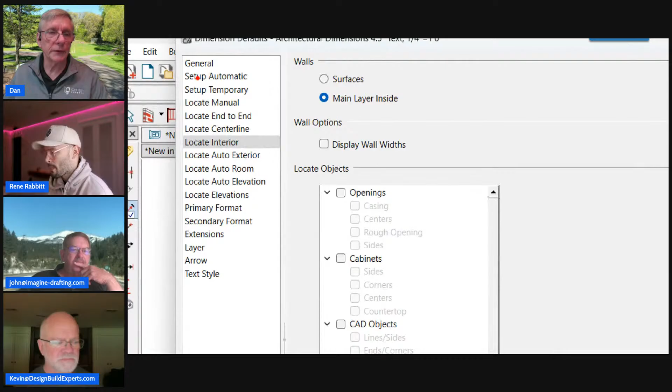Right, here's the other new cool thing - look at this, set up temporary dimensions for every next view shown. Every view - I like that one a lot. So that is a nice one. But cool, awesome, well that was fun, that was a good one. Any other good questions that we have for one more?

What's that one Mike's asking? How many people would it take to request a 1-hour class from your perspective on using a 3D mouse in Chief?

Oh, that'd be good, that'd be a good one. Probably one person - go buy it. Commit to one month of learning it and never look back. Yeah, absolutely, just do it. That's one of those things, just do it, you'll be happy. You will struggle the first week, you will not struggle as much from then on, and by the time the month is up, you will be lost if you don't have your 3D mouse. Because if you're using a Mac, it still has issues, but hopefully it's getting worked out.

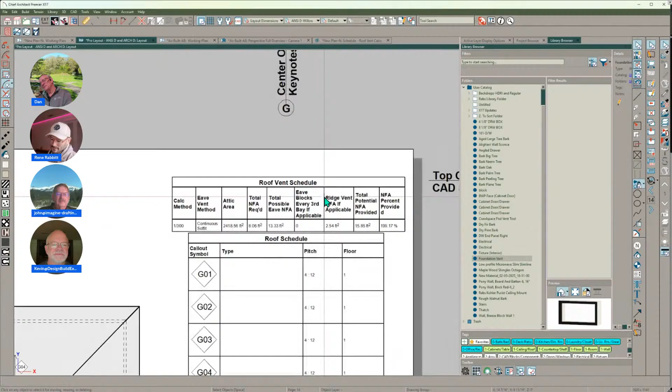Did you guys know that Rene can now link to a spreadsheet in Chief? Yep. It's like Chief does not allow, what is that called? When you can program outside of the program? Rene figured out how to do it. They've had it for a while. It's been in there for a while. A couple of users have used it. I just never really had a use for it until recently. Okay. Awesome. What's really cool is to write back to a CSV file. I just haven't thought of a use for that, but I'm sure someone has one.